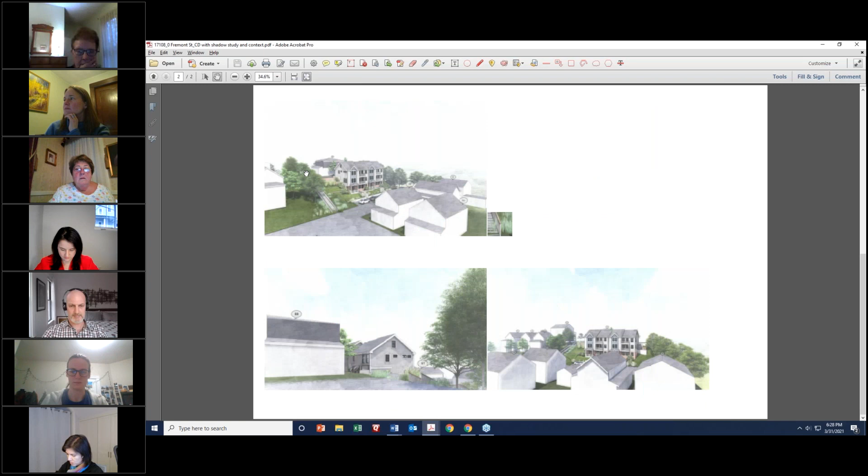Okay, great. So this is what I have from different vantage points. The one in the top left-hand quadrant is East Albion Street, and Roberta, your house is just behind the building.

This house was the design that I mentioned before that was longer than the current one, so it's been scaled back considerably. The footprint has been scaled back considerably.

On the lower left, I think that's our house to the left there, the mansard. Could you zoom into that? I'm just trying to see it. So the bottom left quadrant?

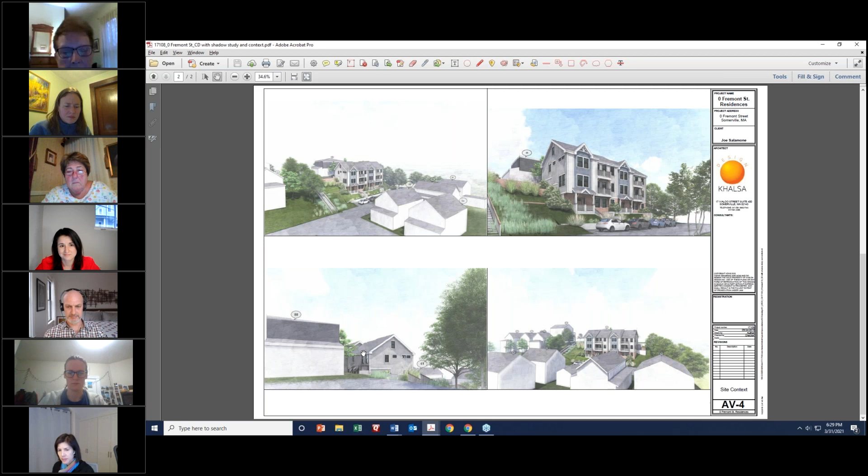It's tiny. Yes, okay, sure. Now that has actually been raised, because the new zoning requires taller floor heights, stories. It is actually a little bit taller than what's shown here, because you were asking what you're going to be looking at - am I going to be looking at a roof or something?

So this roof, I think, is a couple of feet lower than it would be, because we had to increase the story heights to 9 feet, I believe, was the minimum requirement that zoning requires.

Does that help? Yeah, no, it is helpful, just to know what to anticipate. I'm not sure if this is the forum to ask, but a quick question, just in anticipation as a neighbor, an abutter.

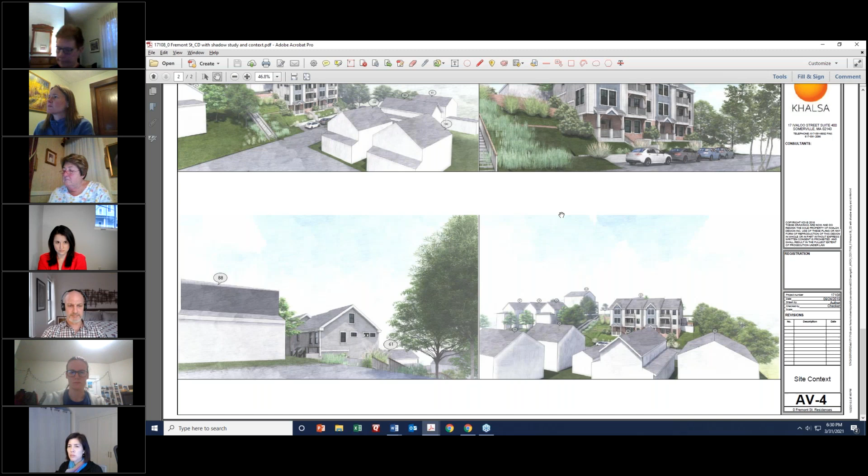How much time do you think it will take from construction groundbreaking to completion? And how will the hours and days work - will they be working late at night or on weekends, just to be prepared for construction? Typically, when there's a special permit, the hours are restricted.

No working on Saturday. If I may jump in and give a staff perspective - construction hours: the applicant is correct that special permits under the old ordinance often regulated construction hours. It is actually the purview of the Inspectional Services Department to regulate construction hours, timing, and methods of construction, making sure that neighbors are not unduly impacted.

So if you have any concerns about construction impacts, it would be best to reach out to ISD. Madam Chair? Yes, Danielle Evans, please. Charlotte, are you saying that the conditions we used to impose before, we can't do that anymore?

It's not that you cannot impose them anymore. It is that it is not standard to impose them. If you wish to impose construction hours, you may, but it is not automatic. I don't want to say it's automatically recommended - it is not typically recommended by staff in the way that old permit conditions often were.

Okay, because I think personally that the hours construction is allowed currently in this city are terrible. I think they're way too long - I mean they go till 7 o'clock at night. No one has any quiet enjoyment of their home when they're surrounded by construction. Until that actual ordinance is changed, I would like to see our board continue to impose stricter standards that allow for quality of life for people living in the city next to construction. So I would want to add a condition.

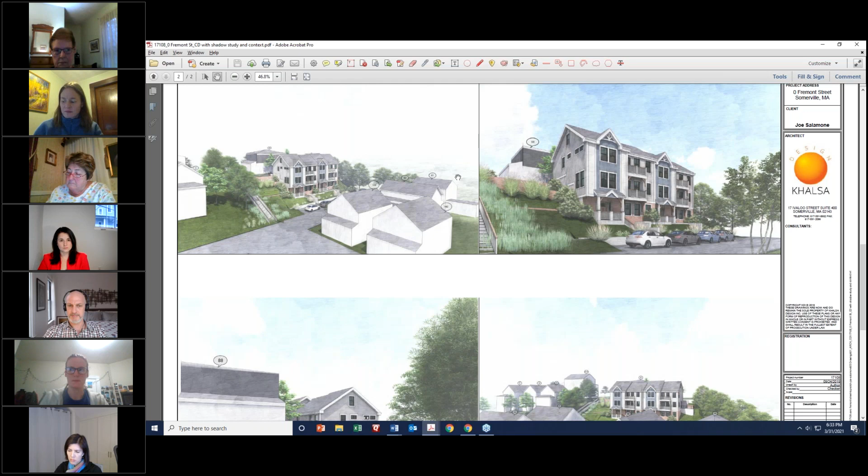This particular meeting is regarding the slope, so to the residents' question, to the folks' question - there will be a meeting, like once this is on, and Dan can jump in because he knows the process better than anybody, but my understanding is there'll be a site plan review, and then there'll be a public meeting baked into the whole process to answer all the questions around construction time and stuff like that.

If it's the wish of the ZBA to put those restrictions in, I don't know how that works, and Dan can probably weigh in on that as well, but I have no problem with that.

I think it's perfectly reasonable to hold on to that ability as a board and put that in. But I just wanted the Suttons to know that under the new zoning, he hasn't triggered any meetings yet, other than this public hearing about the slope ordinance. So as far as the height going up, that's part of the new zoning. But we can certainly address any issues in a community meeting.

Thank you. Okay, that sounds great. Thank you, if I may, Madam Chair.

Yes, please. So this is actually the only public hearing that this case requires. 0 Fremont Street is in the NR district. And if it were not for the steep slope and the requirement of a steep slope special permit, this project would be entirely by right and would not have any required public hearings, public meetings, or community meetings. So if there are concerns about potential impacts of this project, this meeting is the venue to address those concerns at. There will not be the site plan approval process that is required in many of the...

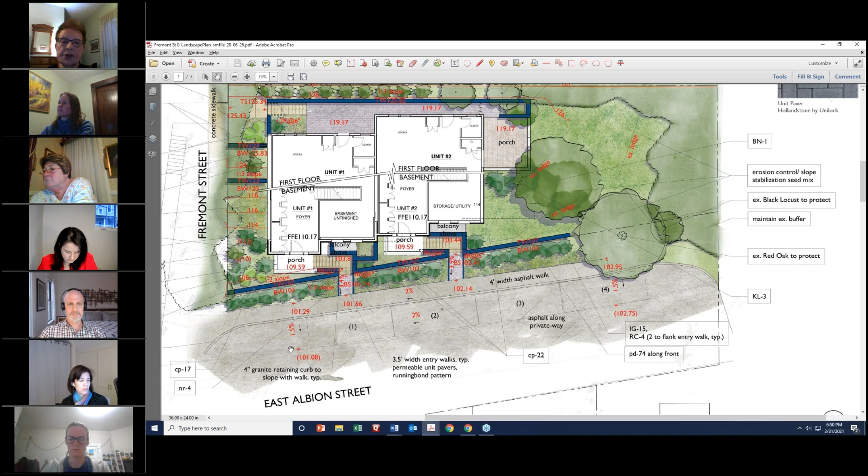When I was down there for a site visit, the property directly across the street had cars all lined up in front of it. I stopped sort of beyond those stairs that come down, and I don't have a very large car, and it's really narrow. So I don't know how, if there's parking on the public street for this new project, and the people across the street are parked there, I can't possibly see how people are going to get in and out, as well as fire apparatus. It was just so tight, and there were no cars parked in front of the wooded lot, or the lot filled with weeds right now.

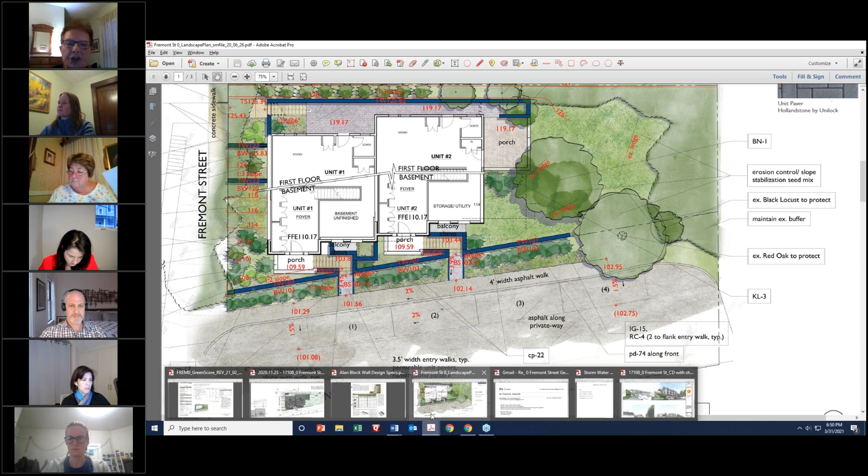I didn't pull in very far, just the nose, and then I backed down Fremont, the other end of Fremont, and then headed back out to get out of there. So when 4 cars are parked for the new project and all the cars are lined up across the street, I think it's going to be problematic for fire engines to get in there, or ambulances.

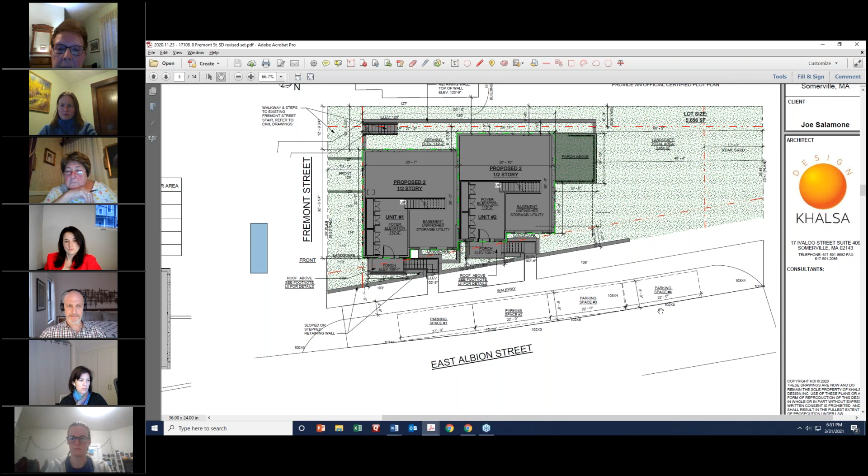Through you, Madam Chair. I just put up this, this should clarify it. The existing edge of pavement is this line. Can you see the pointer on my screen? Yes. This is the current edge of pavement along this line. This pavement is going to be extended to accommodate these parking spaces.

So the roadway is actually 40 feet wide. It's not fully improved 40 feet, but this area where you see this radius line that intersects this other line, this is all additional space that's going to be graded to accommodate these 4 parking spaces. So you're absolutely correct that the street, the way it exists today, this wouldn't work. So it has to be widened in that area to accommodate those parking spaces, and it will be. Does that answer the question?

Elaine? So they're going to widen the street, so it's going to go onto the private property then? How do you widen a street without going into private property? Well, okay, so this is the lot line over here, and this is the existing edge of pavement. So the street is not fully paved from one side to the other. So this allows the roadway to be widened just in this area to accommodate the parking spaces.

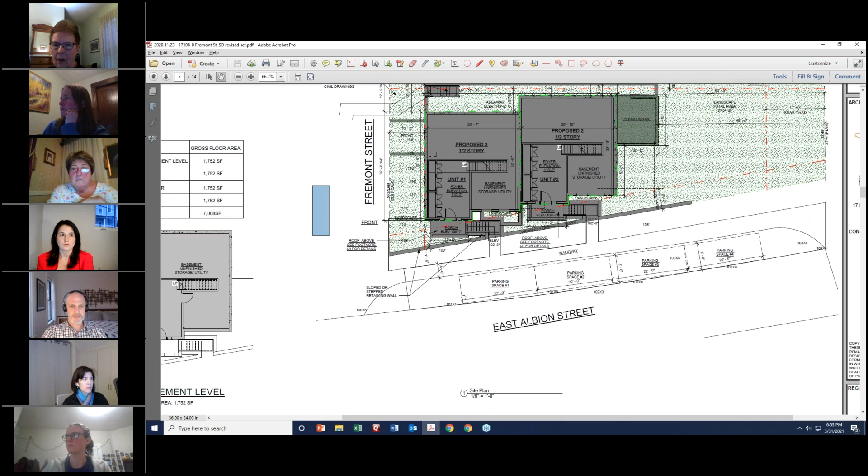But beyond that, Elaine, is the whole street not going to be paved? It's private, right? It's an unpaved street. Well, it's going to be paved. It's paved right now, the right edge of the pavement. Let me bring up another page. So I was just wondering, where is the widening process happening? It is paved right now. Right. And is the widening going to happen on the side where the new construction is going? Yes, here it is, right here in this area where I'm going back and forth with the pointer.

So when there's a car parked in one of those, or all four of those new spaces, and there are 4 cars parked across the street from the existing houses on East Albion, what is the footage from car to car?

Well, there will be no addition, there will be no encroachment, for lack of a better word, into the existing roadway. In other words, these spaces will not encroach into the existing roadway. This area is going to be created, or the roadway will be enlarged, widened to accommodate these spaces. So there will be no additional restriction, it won't be restricted any more than it is right now. It's not going to change the spacing; the roadway that exists now is not going to be impeded by these parking spaces.

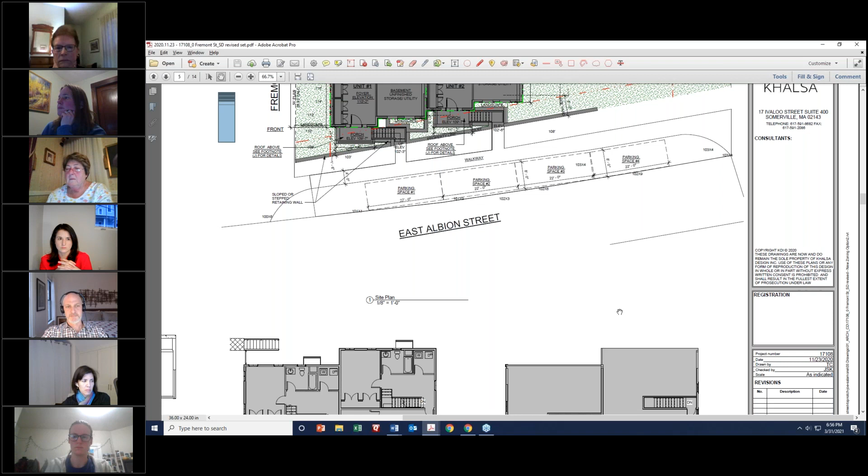These two homes, there's a plan that shows the site plan. So 61, 59, and 100, and then the new house would all be able to share those parking spaces. So the 8 spots are up for grabs.

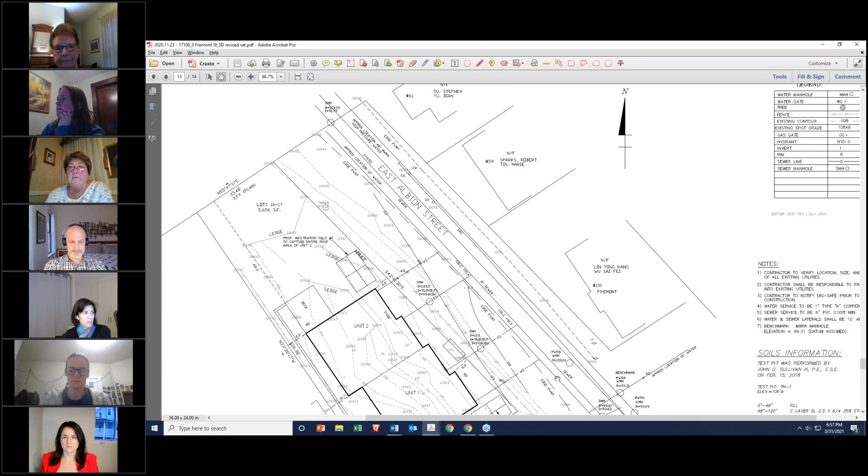Pretty much, that's the way it is now. There's parking there for the residents, and these are 4 additional parking spaces that don't exist today. There'll be 4 and 4 - 8 spots for the new and the old. They're right on that street, it's like a private street. Correct.

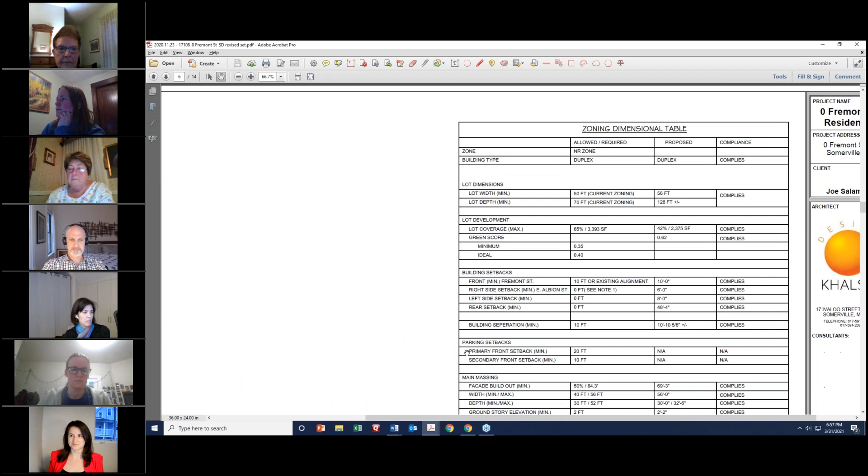All set, Elaine? Yes. Can I go back to Danielle, please, about the noise ordinance? Hi, for the construction hours?

Well, I think we should focus on the slope stuff right now, or the findings that we have to make. So anybody else have something they'd like to say or have a question or something clarified? Catherine shaking no. Josh, are you all set? Yes. Ann, all set? Good. And I'm all set. Danielle, are you all set? Sloping?

So we should discuss as a board if we agree with the findings in the staff report. I'm going to pose to the board, do you have any concerns? Have you given consideration and agree with the findings of the staff report? Is that a yes? Everybody saying yes? Catherine, you're all set. Elaine, you're all set. Josh, yes. Susan, yes. Ann, yes.

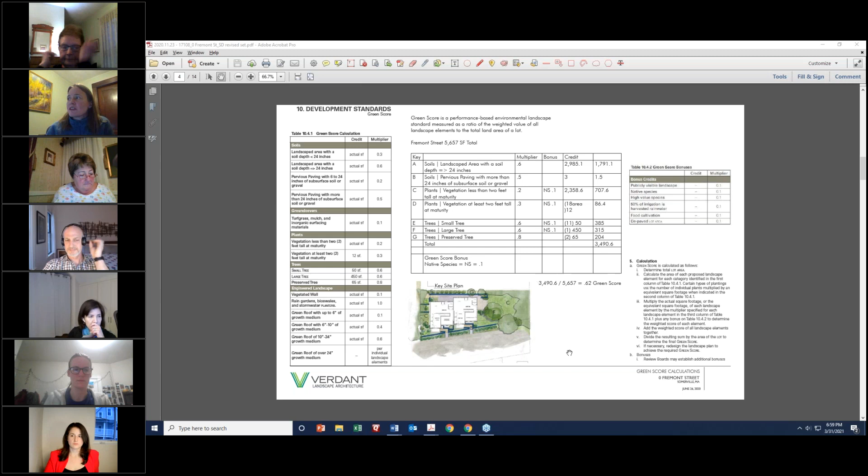I just have a question, maybe I missed it. So there's a front retaining wall at the front of the property - do we know if the city engineer thinks this is strong enough, is this actually retaining earth? Because the third finding is to help protect real property at the base of a steep slope from damage caused by erosion, mudslides, rock slides, falling trees, and other harms. So if there's a rain event and the slope isn't properly stabilized yet, maybe the vegetation hasn't grown in and a tree is uprooted - if it went down the slope, is it going to get caught at that retaining wall and not careen into the people at the base of the slope across the street?

Is that the finding that we're supposed to make? Is Dan here? Dan, can you hear me, Madam Chair? Yes, the proposed design has made a good faith effort at managing the stormwater and site drainage to the degree that you and relevant city departments don't have any concerns about the development.

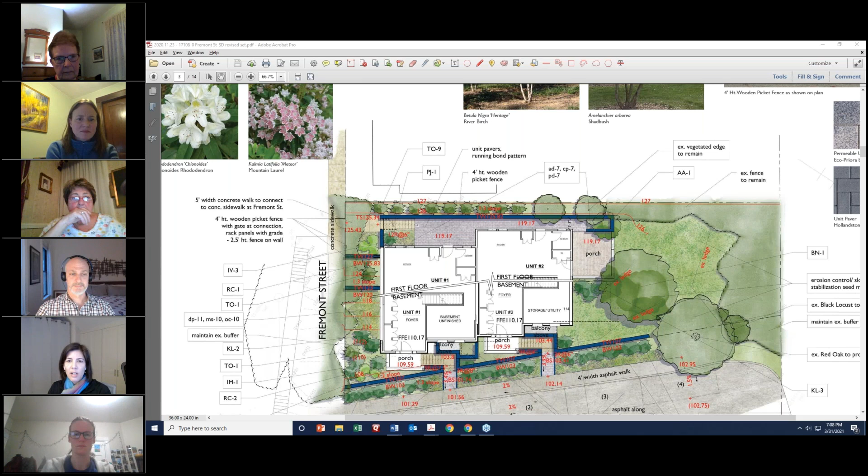Madam Chair, yes, Ann Brockelman? I think for the sake of discussion, Danielle, since this is new to us, I could see a project where I wouldn't want it to even go to the city engineer. Like if they completely blasted off the slope and did something crazy, even if they could prove calculations-wise, or put in stormwater retainage through mechanical means like a tank, I would still be against that. Even though engineering-wise they can make it work, they're completely changing the face of the city, and it's also a question of whether it's substantially more detrimental to the neighborhood, keeping the character. I think we could choose not to approve it to go ahead to the city engineer. I'm just playing the scenario out. So here it seems our role may not be needed, but I could see other cases where we may disagree and not want to grant this permit.

Josh, anything to add? No? Okay. Catherine, everybody? I see too — it's like we're being asked to approve something that's not our expertise, the engineering aspect of this. So it's got to be stated here that we're approving this with the understanding that city engineering will be signing off, and that's where the responsibility lies.

Okay, so any other comments? All right, so you all agree with the findings, and we're going to add these three conditions, Danielle's going to add these three conditions per Brian Holtz, right? And then I'm going to ask the board if they want to apply the staff recommendation permit conditions — yes, that would be this here. Any other conditions we see? Anything you want to add to the report to have it listed? No?